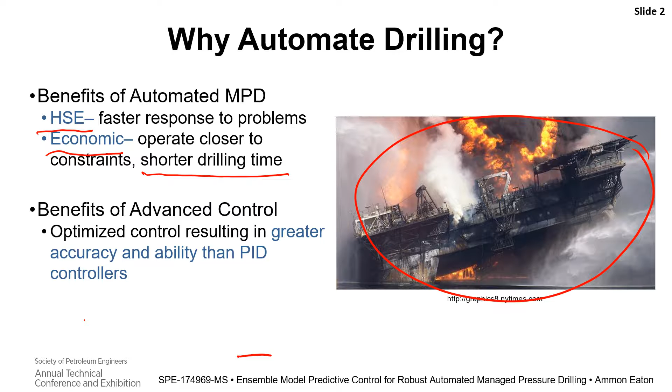The second is the economic benefit. The goal is to reduce the non-productive time and shorten our drilling time, and thereby gain some of that economic benefit. So those are the two main drilling automation motivations. There are more. Now there's a lot of people who are focusing on using PID controllers rather than the advanced controllers, and I want to address that topic for a minute. Our group is focusing mostly on the advanced controllers because of these benefits.

This is a simulation that was done by a colleague of mine, Juno Park, and we have here the conventional PID controllers. This top graph is the bottom hole pressure, the bit pressure. This black line is the set point changes that are happening in this simulation. The blue and red are the model and measured actual pressure from the process. This is the mud pump flow rate, and this is the choke valve opening.

In this simulation, we're keeping the mud flow rate constant and just using the valve to control the process with a PID controller. And you can see that it's struggling to actually meet these set points and these changes. It's trying to have that control, but it doesn't actually have control over the system. It's not doing what we asked it to do.

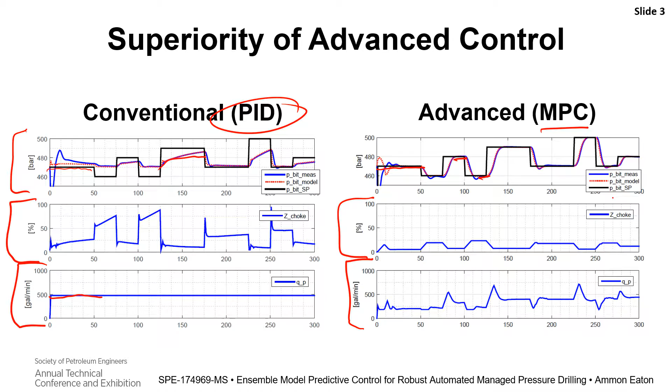Now if you compare that to the advanced controllers, you can see the same set point changes here with the model predictive control, and we're using both the mud pump flow rate and the valve opening to control the process, and we're actually reaching our set points and able to maintain control over the system. So this demonstrates why our group is focusing on advanced control. We feel like it is a better option for industry, and where there hasn't been a precedent set yet with managed pressure drilling automation, we'd like to show the benefits of using the advanced method.

Now these advanced methods aren't entirely without problems. They do have some issues, and that's what we're trying to address with this research. One of the issues is that because they use an optimization routine to iteratively solve for a solution, there's no guarantee of convergence of those equations. There's no guarantee that it will actually find that optimal solution.

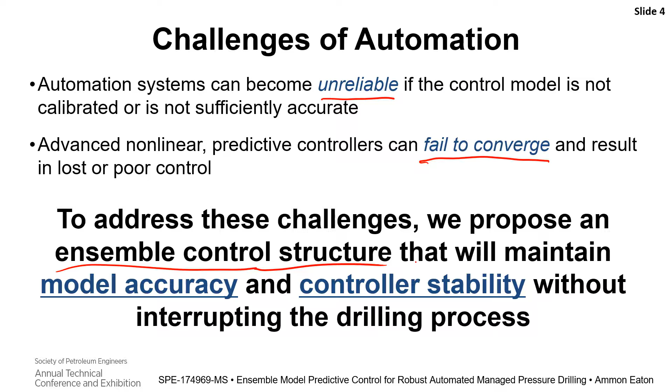And so some problems that can come is lost or poor control, and that relates to the reliability of the controller. Also, these controllers rely on a model of the process, and if that model is not sufficiently accurate, it can also cause problems. So to address these challenges, we've come up with an ensemble control structure that will help maintain model accuracy and keep the controller stability without actually interrupting the process.

So let me just introduce this structure real quick. Here's a diagram that shows we have here three individual model predictive controllers, advanced controllers. One that uses a high fidelity model of the system, one that uses a lower order first principles based model, and one that uses an empirical model that's purely based off the data.

And these controllers run in parallel with each other, taking the readings from the well, and they offer their suggestions to a switching algorithm. Now this switching algorithm currently uses a very simple process. It uses the high fidelity, the most accurate model first. It then will switch to the lower order model, which is less accurate, and then finally the empirical model. Once it decides which controller to use, it will send that back around to the actual process and implement the valve position and mud pump flow rates.

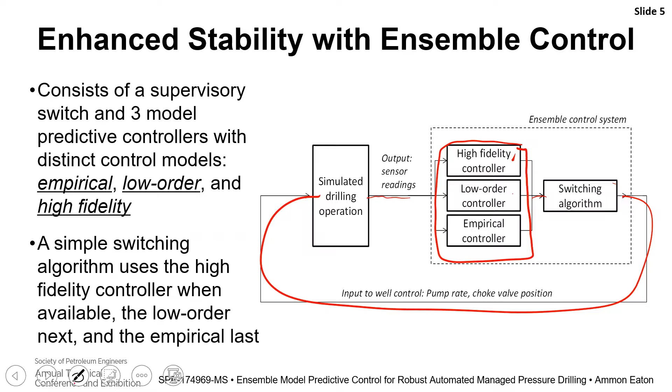So the advantages that come with this ensemble control method is that it is robust and adaptive. It can adjust to changing conditions. Also, one of the inherent benefits of the structure is that you can tune and troubleshoot one model without interrupting drilling. And if there's failed convergence on one of the solvers, you also have the ability to switch to another controller that's ready.

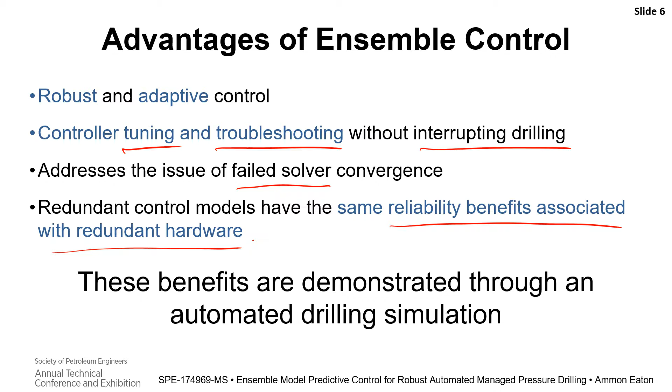Additionally, you have the same benefits that come with hardware redundancy. If you think of pressure sensors or temperature sensors at a certain location, processes will often have redundant sensors, and if one goes out, you have another backup right there. So with these advantages, we set out to test this controller through simulation.

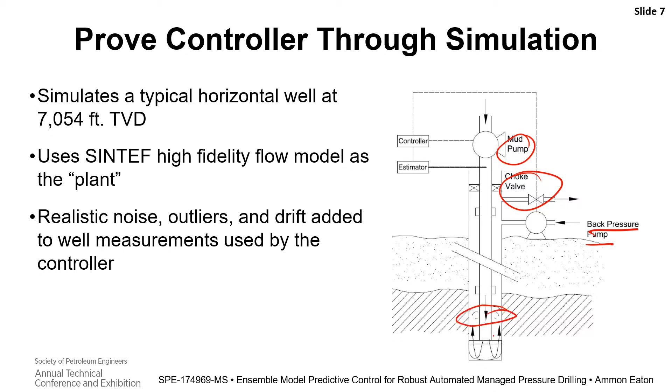And the simulation that we did used the SINTEF high fidelity flow model as the plant that we were controlling. We simulated a horizontal well with a 7,000 true vertical depth, and we make use of a back pressure pump, a main mud pump, and a choke valve. We also, in our simulation, assumed bit pressure measurement using mud pulsing.

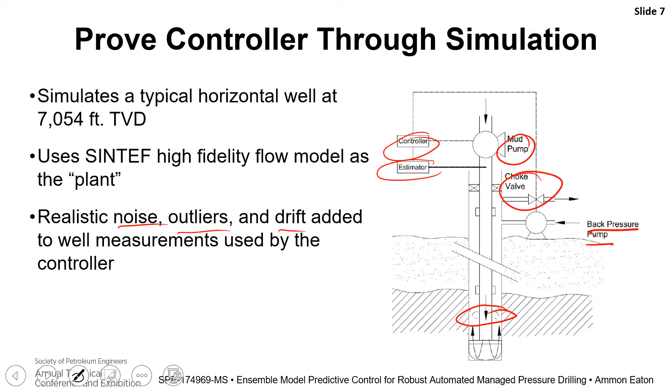And in the measurements that would come into our controller and our estimator, we added noise, outliers, and drift. And we wanted to ensure that our controllers wouldn't get caught up in some of the noisy measurements, the realistic measurements that are actually happening. So the goal of the simulation was to maintain the pressure. Now we did normal drilling operations, and we did a pipe connection procedure.

And for the normal drilling operations, we had plus or minus 1 bar of the set point. That was our objective, is to keep the pressure within that. And then for the pipe reconnection procedure, it's plus or minus 5 bar. And we do that again by adjusting both the mud pump flow rate and the choke valve.

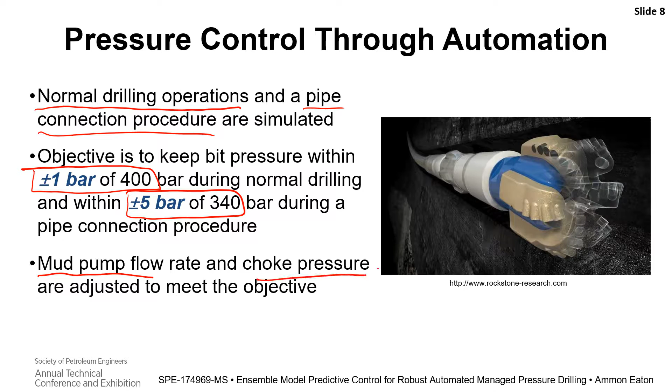And one of the issues that we noticed in using this ensemble controller is when we'd switch between the high fidelity and the low order, or the low order and the empirical, we'd get this jerk that would happen, this sudden change from one operating region to another.

And the reason why that happens is because each of these model predictive controllers, again, are using an optimization algorithm to find the solution, but they're looking for that solution in different numerical regions. So they're using different numbers to come up with a solution.

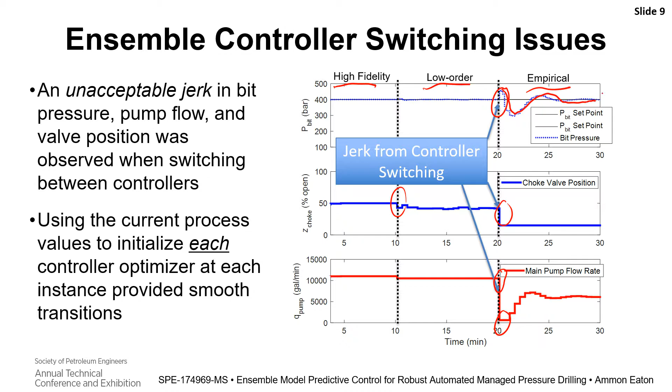And so when you switch between them, they jump to where the next controller is looking, and you have this unacceptable jerk, and you can see here how it affected the bit pressure. Well, again, that's a stability issue we want to address and make sure that's not going to happen.

So what we did is we took the current drilling process measurements and fed those back into the controller, and used those as the initial guess values for each of the controllers, and that allowed the optimizers to stay in the same general area as each other and to keep near each other.

And this is really tight pressure control. This is something that hasn't been achieved. And granted, this is a simulation, but it just shows you the proof of concept that this is a possibility. So this shows the normal drilling.

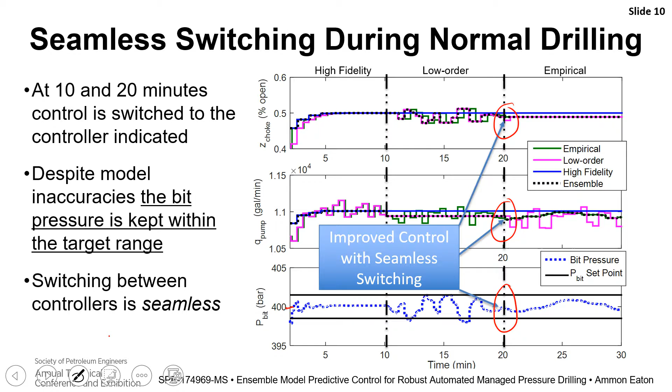Now if we go to the pipe connection procedure, during a pipe connection procedure, we lose that mud pulsing measurement. So we lose our bottom hole pressure measurement, and the controller is forced to use only its predictions that it gives from each of the models.

And during this connection procedure, there's no need to switch between controllers because there's no calculations happening during the connection procedure. There's no possibility of failed convergence or stability issues. And so we stay with one of the controllers, and here we use the low order controller.

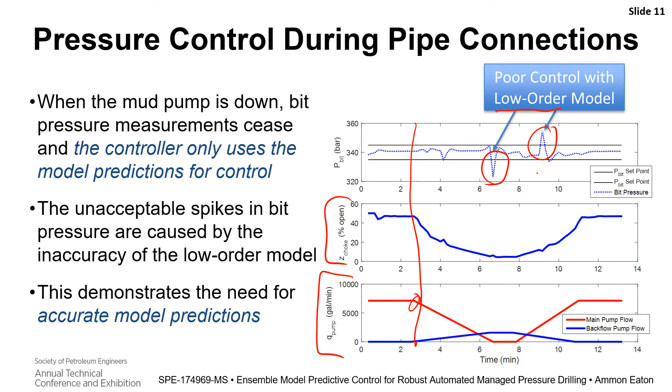At this point is when the pipe connection procedure started, as the mud pump ramps down, and you can see that just based on its predictions, it does a pretty good job, but it isn't quite good enough. So if we use the high fidelity controller to do this exact same simulation, the accuracy of that model keeps us within our desired set point, that plus or minus 5 bar. And again, here's the valve movement and the pump movement.

So again, plus or minus 5 bar is fantastic. That's really great control that these advanced controllers are able to do just using the valve and the pump.

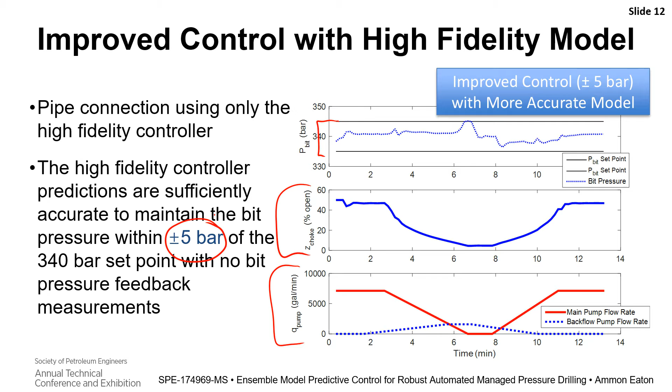So in conclusion, our Ensemble control structure addresses model accuracy issues by using the most accurate model available. It also addresses the controller stability issues, so that if one controller becomes unstable, it switches to another. And using our switching algorithm and our feedback, our seamless switching, we are able to stay within the same region and provide acceptable control. Also, the inherent benefit is the ability to tune and troubleshoot without interrupting the drilling process.

Now, some of the future work that we're planning on, and we'll be reporting on later, is we want to use the high fidelity model to tune the empirical model. So that empirical model will converge most every time, but sometimes it gets out of tune when you enter a different operating region. And so we'll use that high fidelity model to tune the empirical model in real time, and meanwhile we'll use the low order model to control the process until that tuning is complete.